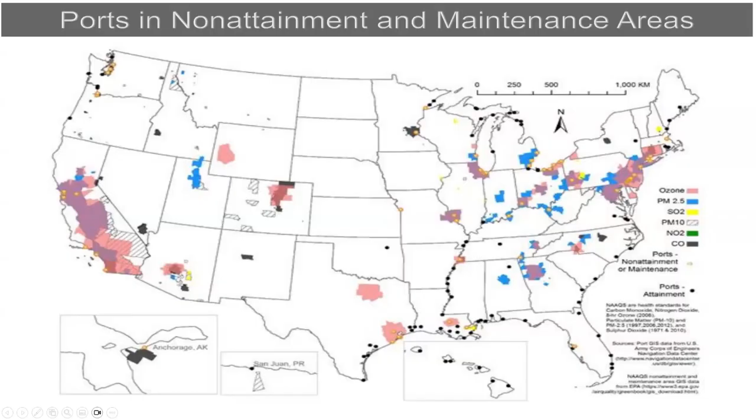And as you see with the legend here, the types of air pollutants: ozone in pink, PM 2.5 in blue, sulfur dioxide in yellow, PM 10, this is a larger particulate, nitrogen dioxide in green, and carbon monoxide in black. As you can see, we're hitting all these coastal areas or even areas that follow the major rivers, and you really have a close proximity associated with these air quality compromised areas from all the diesel emissions.

So when we look at a port, there's not just the vessels. We look at these types of equipment associated: drayage trucks, I'm going to show you photos of these in the following slides, freight rail trains, cargo handling equipment, harbor vessels, these are the tugboats and barges that stay exclusively within New York Harbor, and then ocean-bound vessels.

Drayage trucks are a combination of the short-haul trucks that move cargo into and out of ports. They typically travel the shorter distances to and from a port to a nearby rail yard or distribution center, like an Amazon, for example. Amazon is a huge driver these days, as we know.

Rail emission sources include switcher and line haul locomotives. Switchers move rail cars short distances within a rail yard, and the line haul locomotives are those long distance engines that travel from the port to those distance locations.

When you look at the boats, the vessels, or sometimes they're called crafts, you've got two types generally. Harbor vessels, these are engines less than 30 liters, called Category 1 and 2 vessels: tugs, barges, and ferries. Then you have the ocean-bound vessels, much larger engines, typically more of your diesel engines, greater than 30-liter engines. These are Category 3 vessels, called bulk carriers, container ships, cruise ships, roll on roll off ships, and tankers, like fuel tankers.

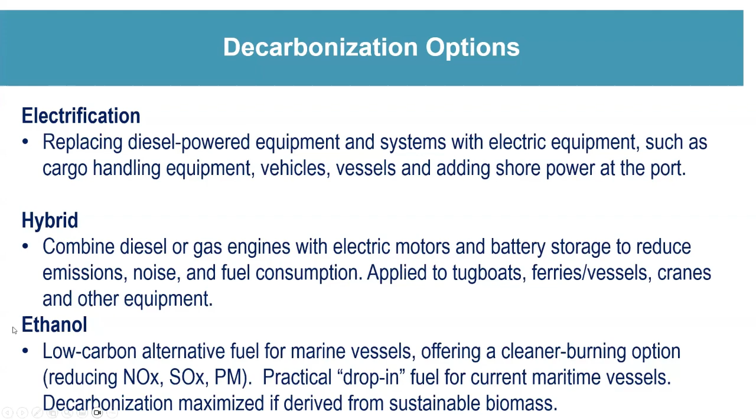Biodiesel, that's another low carbon fuel. Sometimes they use fatty acid methyl ester, also called FAME, often derived from cooking oil. Hydro-treated vegetable oil, soybean based, is very common. This reduces greenhouse gas emissions and black carbon soot by up to 81%.

Methanol, another low carbon marine fuel, reduces sulfur dioxide and PMs by over 95% and nitrogen oxides by up to 80%. It is liquid at ambient temperature, easier to handle, store, and bunker than gases like LNG or ammonia, and it's ideal for retrofitting vessel engines and has a low ignition temperature.

Ammonia, this is being used more in Europe. Ammonia is a low carbon marine fuel. It has a high energy density, no CO2 emissions. The toxicity requires specialized training for crew with robust safety regulations. The goal is to use green ammonia, produced from renewable sources, to end up with zero emissions. Blue ammonia is natural gas based production of ammonia that can also be considered, with carbon capture to help reduce those emissions.

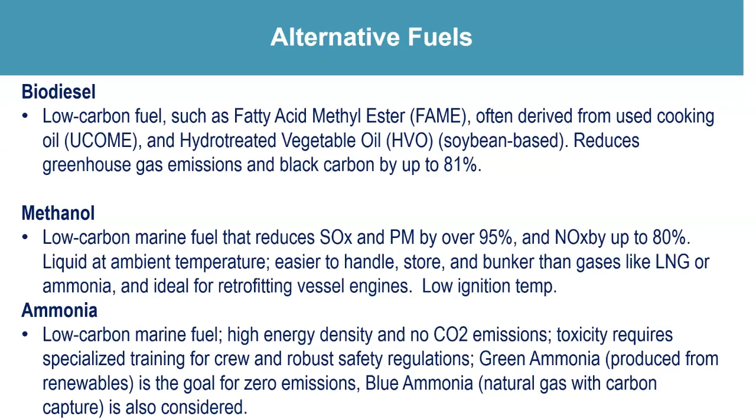LNG, liquid natural gas, is a cleaner burning fuel alternative to diesel for shipping, reducing sulfur emissions by 99% and NOx by 25%. Modern vessels use dual-fuel engines that can operate on both LNG and traditional fuels, and this is more common as we look at the fleets out there today. There are over 772 active vessels using LNG.

Hydrogen. This would be an amazing fuel source. It's very expensive, but it's still being rolled out. This is a zero emission fuel for maritime decarbonization, using fuel cells or modified engines to eliminate pollutants, emitting only water vapor. Hydrogen can be stored as a compressed gas or a cryogenic liquid. Liquid hydrogen requires 4 times more storage space than diesel for the same amount of energy, so that impacts cargo capacity, which is a challenge.

So as it stands today, hydrogen is being used more on harbor vessels with shorter trips because of that cargo capacity need. And again, you have to look at how the hydrogen is produced. Green hydrogen is produced from renewables, and Norway is producing hydrogen using offshore or onshore wind, and that process results in net zero emissions.

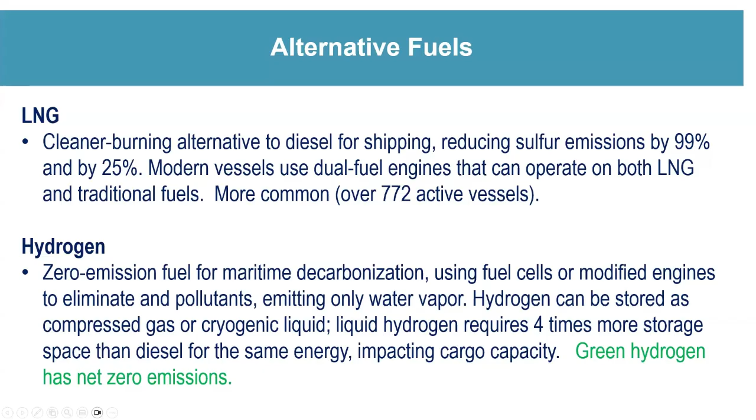When we look at New York State, biodiesel and renewable diesel is being rolled out and used in pilot programs. Ports biodiesel is being sold wholesale and incorporated into terminal product offerings in the New York region. Renewable diesel is beginning to also appear at the terminals. Trials are underway across multiple ferry operations. When you ride the Staten Island ferry today, that's powered by biodiesel — a nice success story. Other ferries are starting to use it as well.

The engine warranty implications are an active concern, sometimes requiring a bit higher maintenance on these engines. Diesel engine compatibility varies by age — older engines present greater integration challenges than newer diesel engines. Sourcing and storage logistics are a barrier too; fuel is being shipped sometimes from as far away as the Gulf Coast, and identifying storage locations locally in the New York Harbor is a bit of a challenge.

As New York State looks to incentivize using biodiesel and renewable diesel, other states have been successful and effective in increasing biodiesel production by issuing policy incentives for these ports. So New York State is now considering introducing policies to support these biodiesel fuels.

Alternative fuel status: as we look across the industry, current baseline nearshore operations use ultra low sulfur diesel fuels, while offshore vessels largely rely on heavy fuel oil. That's kind of our starting point when we look at transition of different fuel types.

Hybrid vessels are a transitional strategy. That technology is being deployed in offshore wind vessel support operations — I'm going to show you a hybrid vessel in a few slides later. So it's suggesting a pragmatic stepping stone approach towards a fuller alternative fuel option. Hybrids are a nice step one, but not the full answer.

Key potential drivers: marine vessel emission standards were cited as a potential catalyst, and prospective port tenants have interests in alternative fuels. Research and development is ongoing at some ports, but it's always contingent on investment.

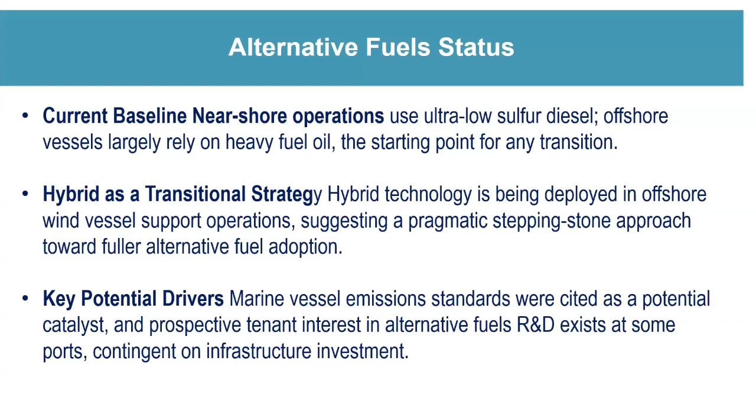So where we are today, the fuel transition period is the reality. Like I was saying, it's these hybrid technologies, biodiesels, low carbon fuels, ethanol, methanol, even ammonia. This is where we are today. It's a good starting point. We're not at zero emissions yet, but it's reducing those emissions. New fuels face three major hurdles: price, availability, and infrastructure. So all of those things is what our future engineers, port operators, and vessel designers need to focus on. I'm hoping some of those are in our audience today. So this is going to be your challenge to work on these hurdles to rolling out improved fuels.

Some port and vessel owners are moving ahead. Many have set decarbonization paths. Some outpace regulation. One of the main reasons port and vessel owners are moving ahead is using these fuels and improved operations are opportunities for cost savings and operational efficiencies. So you can pursue a green port operation and result in cost savings, and that's attractive to any port vessel operator. Also, many companies have ESG goals, and they're doing their best to incorporate those goals into port and vessel operations.

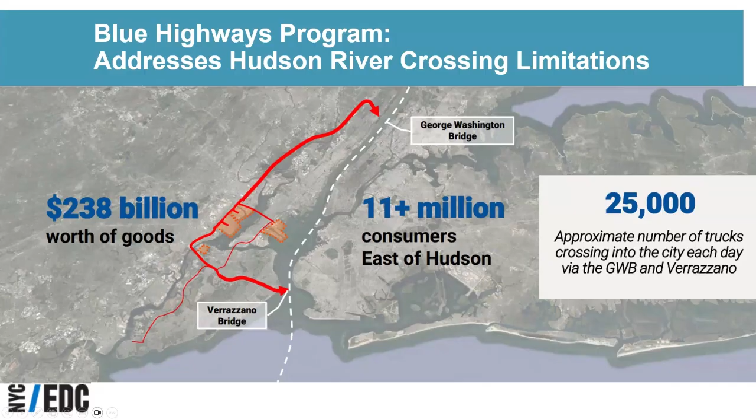So again, trying to move the freight away from the trucks: 90% of the freight is moved by truck today, and only 8% is moved by water.

So they're looking holistically at the supply chain, from the first mile to the last mile - from the factory and container ships, that first mile to middle mile being the tractor trailers and then regional distribution. Let's get it off the roads and down here to barges, ferries and piers. And then finally, once you arrive at the port, that last mile, instead of box trucks to the customer's home, you can use electric cargo bikes and electric vans to reduce emissions as well - looking at the whole supply chain transportation system.

So when you look at the Blue Highways program, the inbound barge deliveries to Hunts Point Food Distribution Center up here in the Bronx - we're going to be looking at maximizing freight movements there by barge. Outbound barge deliveries from ConAg Hunts Point Terminal go to 2 landings in Manhattan and Brooklyn. So once they depart here, these are the destinations they're looking at to help distribute across Queens and Brooklyn.

Here are current fleet emission reduction measures as part of the Blue Highways program. They're making some meaningful progress, switching to renewable diesel fuels as the best way to quickly reduce carbon emissions - a drop-in fuel replacement that results in 60 to 75% less carbon intensity than ultra low sulfur diesel fuels.

Two vessel pilots were completed in June 2025, targeting a fleet-wide rollout in 2026 - I believe that's one of their ferry fleets, New York City waterways. They're also looking at upgrading the largest vessels to EPA Tier 4, the most efficient diesel engines out there today. This will result in local air quality benefits, reducing NOx emissions and PM emissions by more than 60%, and the design and planning process is underway.

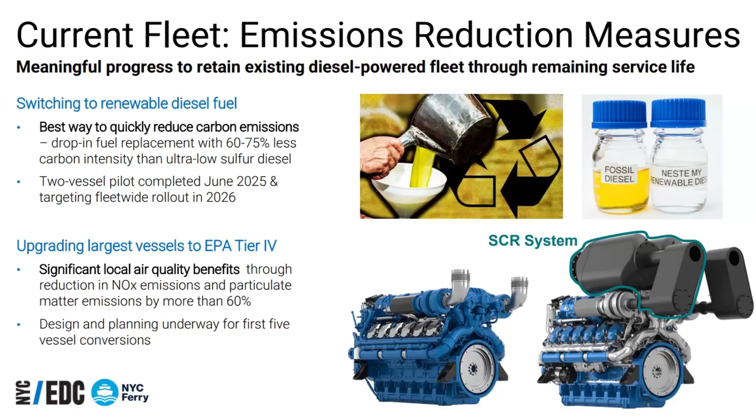And then looking at the fleets, there's a zero emissions transition. Fleet scale deployment requires early stage technology to advance, but they're starting out with pilot projects - as you can see, battery and fuel cell vessels, hydrogen powered fuel cells and batteries are under consideration.

This is a ferry called Sea Change, out in San Francisco I believe - I've got a slide on that later. That's one of the first hydrogen-powered ferries in the U.S., so that's under consideration. They're also looking at combustion engines with green fuels, introducing alternative fuels like methanol and ways to convert diesel engines to use cleaner fuels. And they're also looking at battery and charging development - there are early stage efforts to unlock new vessel construction methods, form factors that drastically reduce energy needs and ease the transition challenges.

So they're focused on that transition as well. This is just the beginning of these studies, so keep an eye out for progress on these three fronts.

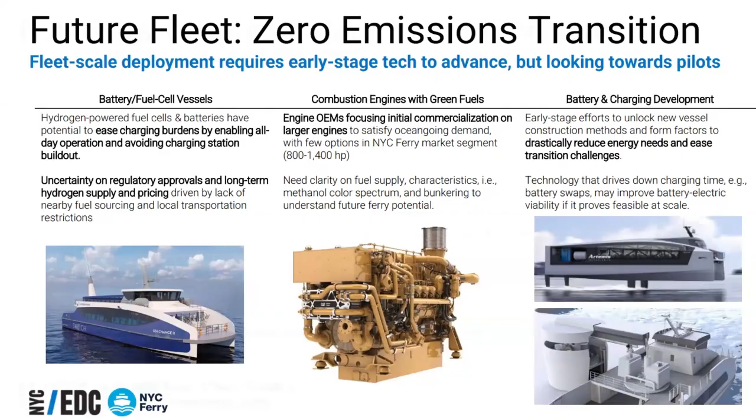Pathways towards harbor decarbonization. A citywide harbor plan will streamline this decarbonization effort. Ongoing efforts include increasing usage of waterways for freight transportation, using zero-emission vehicles and vessels to decarbonize the supply chain, and New York City Ferry sustainability planning towards zero emissions, that's happening.

MOCEJ, the mayor's office branch, completed the city's first harbor inventory of marine activity and emissions in the harbor. Contrary to expectations, smaller vessels such as ferries account for the majority of harbor emissions. That's really the focus of why they're targeting ferries, because they result in 90% of all New York City harbor emissions.

Over 50% of the emissions can be reduced by decarbonization of the top 100 vessels, and I think that means the top 100 polluting vessels.

The planned efforts, as part of this decarbonization plan, include interagency coordination. There's going to be a harbor inventory, looking at the ports and harbors holistically, and coordinating those decarbonization efforts across all city and state agencies, then leading a comprehensive decarbonization plan that outlines a phased, actionable pathway to carbon neutrality in the harbor by 2050. Very lofty goals, and it's all underway.

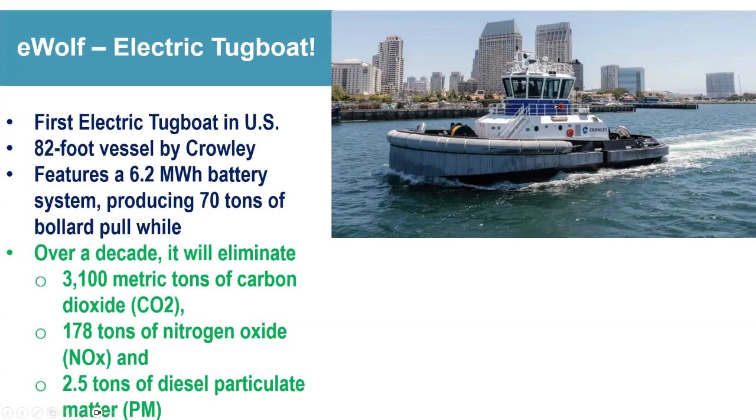In use over a decade, it will eliminate 3,100 metric tons of carbon dioxide, 178 tons of NOx, and 2.5 tons of diesel particulate matter. That's just an example of what a diesel tug would emit, but now it's electric. It's being used out in San Diego, I believe.

Crowley also has what they call an E-tug, a hybrid tugboat, hybrid electric, a little larger at 89 feet, very efficient and astute design. It's crafted to comply with the latest CARB regulations on the West Coast, California's air emissions regulations.

This is the first hydrogen ferry, called Sea Change, in San Francisco, where all these great things start. It's a 70-foot, 75-passenger catamaran using hydrogen fuel, built by All American Marine. The vessel owner is Switch Maritime, and it has a 300-mile range. Very exciting, love to see those in New York.

So holistically, when we look at the port side emission reductions, here's some of the trends we're seeing. Port Authority at Port Liberty, New York, that's their major port in Staten Island. They are electrifying cranes and equipment out there.

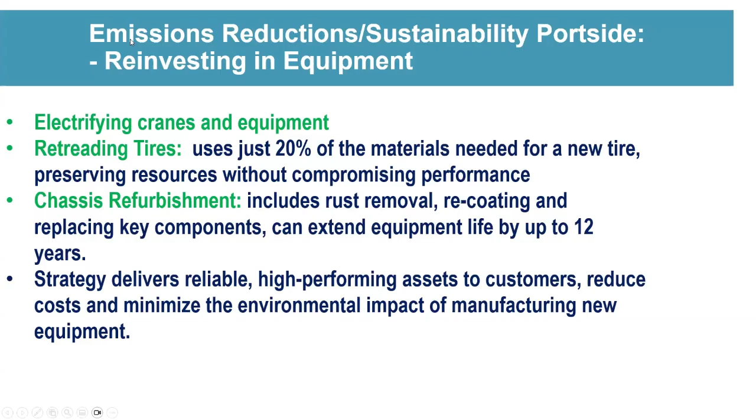So these strategies deliver reliable, high-performing assets to customers, reducing costs, minimizing the environmental impact. So it's just kind of maximizing the equipment they have. But a lot of great progress is happening with electrification.

Global Insights. I was recently at a panel discussion at the Norwegian consulate, and these slides were shared. So this is just kind of perspectives across the globe. The European Union, their views on reducing emissions at ports - they have a very clear ambition to do so, and they're looking at making their regulations more strict.

China, believe it or not, has a goal of being net zero by 2060, and they're giving large investments in new fuels. The U.S., it's a mix. This is where we are today, politically, unfortunately.

There's a lot of entities that are against a global carbon dioxide tax. But New York State and other states, especially California, have different policies and incentives that are encouraging these transitions to decarbonize the ports.

This is the International Maritime Organization. There's a net zero program adoption that's pending. And on the just independent commercial side, there's a large variation - some companies are kind of neutral and not doing much.

Three-quarters of the new orders for container vessels have dual fuel capability, meaning they have the capability of using these alternate fuels. So that's nice to see. Three-quarters of the new vessels are allowing this capability.

This is just showing the share of emissions. The large bulkers and tankers and container ships account for more than 50% of the world fleet's emissions. So that's really the bulk, the worst of the emissions are coming from these larger ships. Kind of makes sense.

Alternative fuels uptake. So this is where we're seeing that transition to using alternative fuels by fuel type. What we're seeing today is the majority have that natural gas for now, but we are seeing an increase in methanol, LPG, hydrogen, and ammonia are the newcomers that are still being rolled out. But on the whole, the majority is still natural gas, so reduced emissions - that transition is underway.

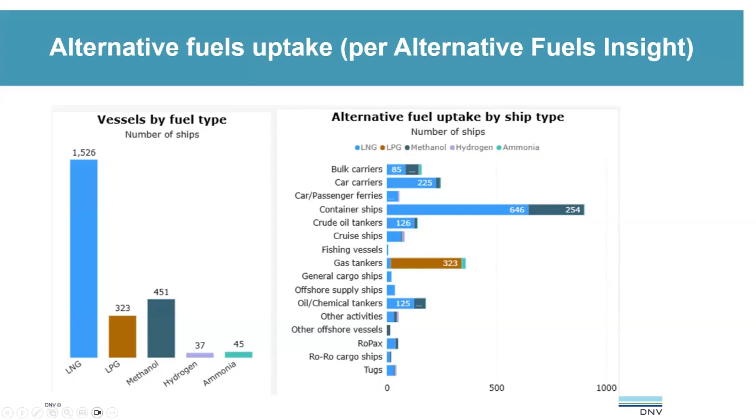So this is what the consensus was from the meeting at the Norwegian consulate. Geopolitics influence fuel availability and selection. The majority of bulker and tanker new construction opt for fuel-ready solutions like LNG, or ammonia-ready, or methanol-ready. Biodiesels and bio-LNG is likely to be the most accessible low greenhouse gas fuel due to existing infrastructure and production capacity. There is a broader range of fuel options available in the future.

We just keep seeing this trend, and that's expected. But there's cost drivers - as low greenhouse gas fuels remain affordable, their use will strengthen the business case for implementing energy efficient measures. So again, as the demand grows, like you're seeing in Singapore and Rotterdam, that's really what's going to drive the market and help ramp up the production of these alternate fuels. That's what you really want to see, and that also, with greater volumes, it helps bring down the price and make these fuels more affordable.

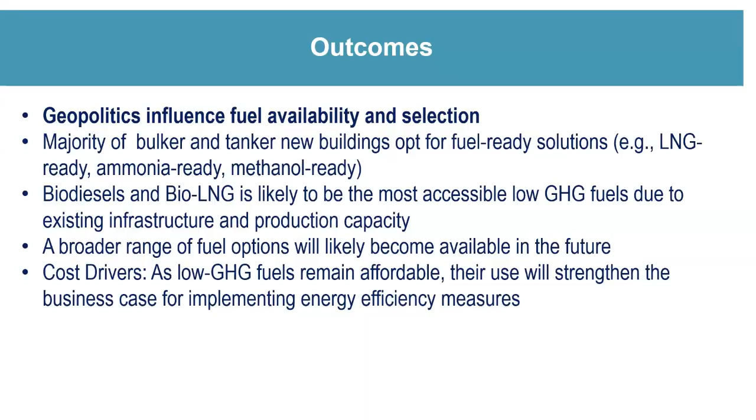So finally, we're going to take a look at Norway. Norway is really leading the charge with green port initiatives and decarbonization initiatives, so we definitely have to take a look at what they're doing there.

So they have a green shipping program that aims to establish the world's most efficient and environmentally friendly shipping sector. This is a paradigm shift in the maritime sector.

Emissions are regulated and carry a cost. There are growing green requirements from the market, investors, and the public. They don't have the geopolitical issues we do, and their population is on board with these initiatives. Climate change and new requirements represent a significant business opportunity.

The vision is to establish the world's most efficient and environmentally friendly shipping sector, achieve profitable emission reductions, deliver sustainable logistics solutions, create green jobs, strengthen competitive advantage, reduce dependency on diesel fuels from countries you might not want to be doing business with, and achieve international leadership positions in this sector.